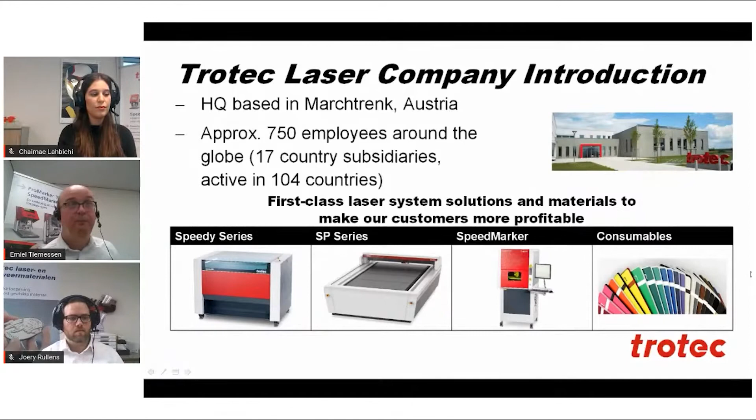Why would you use a laser to earn money? The laser is a universal tool which can be used on a wide range of materials for all the applications stated.

Depending on the type of business you are having or going to start, you can use the laser for different applications. For example, we have customers who have dedicated laser job shops, specializing in engraving products like type plates, data plates, etc. Here you see a product made by a customer of ours in the Netherlands who started in the attic of his house. These people are very creative in thinking of the right solutions for the customer, and they are also able to manufacture all these ideas by themselves with their laser.

Another type of application is adding value to products already in your shop. Think of a gift shop who can instantly personalize your gifts with the desired text. For example, here we see a cutting board and a knife engraved with a laser, from a customer of ours in Amsterdam who has laser machines in their shop. The shop is mainly about cookware, bakeware, etc., and they can personalize almost every product in the shop with engraving. They started in the past with one engraving machine, and once they started laser engraving, they saw quite a lot of extra possibilities, with people coming in for the laser engraving, even people from other shops bringing products to get them engraved.

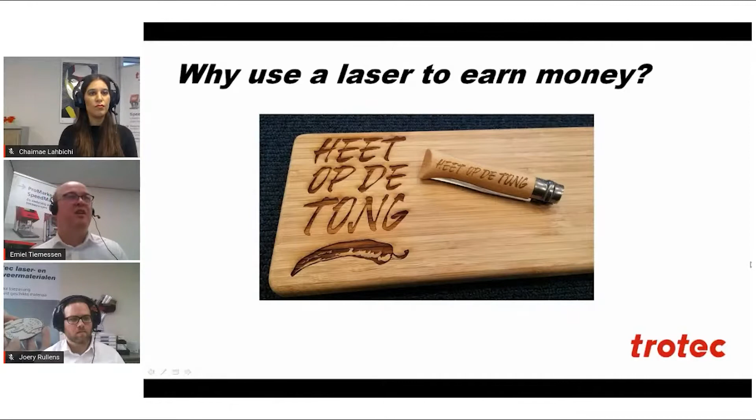So at this moment, they are working with three lasers. And the number of products you can engrave with a laser are uncountable. Think also about bags, wallets, mirrors, jewelry, belts, cutting boards, bowls, knives, etc.

Another type of application where you can earn money with a laser is, of course, saving on costs. For example, companies using a lot of data plates or type plates, panel labels, often need large volumes with short delivery times. Then it often makes sense for them to produce them in-house instead of outsourcing it to external suppliers. For example, you see here a production of our own data plates for the machines, which is also, of course, a typical laser job of working on anodized aluminium.

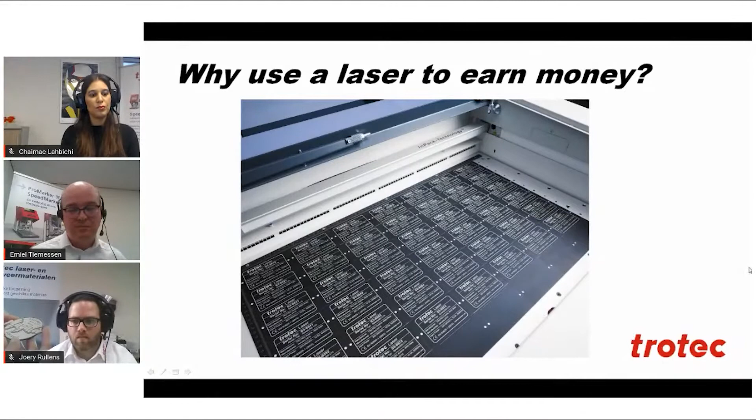Let me briefly explain how a laser works. Well, basically we are talking about three things: engraving, marking, or cutting.

When laser engraving, the concentrated laser beam is focused onto the product you want to engrave. What the laser does is ablate the top layer of your product. On a laser laminate, we remove the top layer so you get a contrast. For the black-white, you remove the black and see the white sheet behind to engrave text plates. But also when you engrave woods, you remove material from the top of the plate, and you get a contrast because the wood gets darker.

Typical products created when using laser engraving are trophy plates, name badges, photo engraving, rubber stamps, promotional products, and computer-generated artworks. Many familiar materials are paper, cardboard, fabrics, acrylics, just to name a few.

Laser cutting is a little bit different. With laser cutting in plastics, for example, we concentrate the beam on the top surface of the material, and the laser melts itself through the material to get a nice clean cut. When you cut acrylics, for example, you get a very nice glass sharp cutting edge. In wood, the laser evaporates the material away, so you can almost say it burns away through the wood to get it cut.

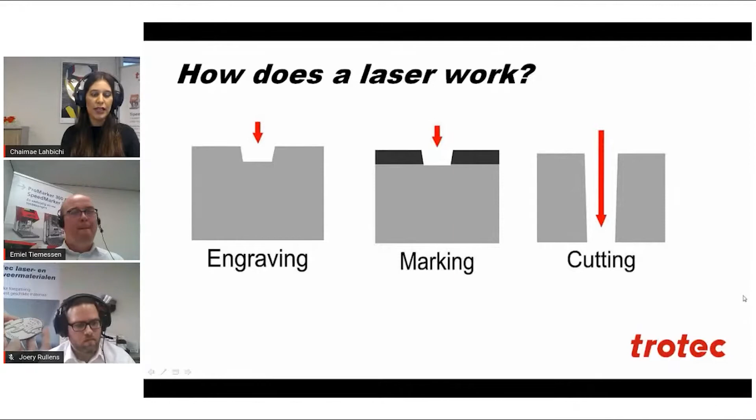So thank you both. Let's first of all start with what kind of materials we can work with. What we see now on your screen are 3 different groups of materials that you can edit with your laser. The first is wood, glass, paper, etc., which are the organic materials. Then we have the metals and the plastics. These are the 3 groups of materials you can edit with your laser, which you can work with.

As Trotec laser, we have 2 different kinds of laser sources. We have, on the one hand, the CO2 laser, and on the other hand, the fiber laser. Just a really rough description of those two is the CO2 can do anything except metals, and the fiber can do nothing except metals. Like I said, this is a really broad distinction between the two. As you can see, the fiber can also colorize plastics, or you can, with an extra marking paste, for example, mark solid on stainless steel. You can do it with a CO2 laser, like a coated metal, or anodized aluminum directly with a CO2 laser.

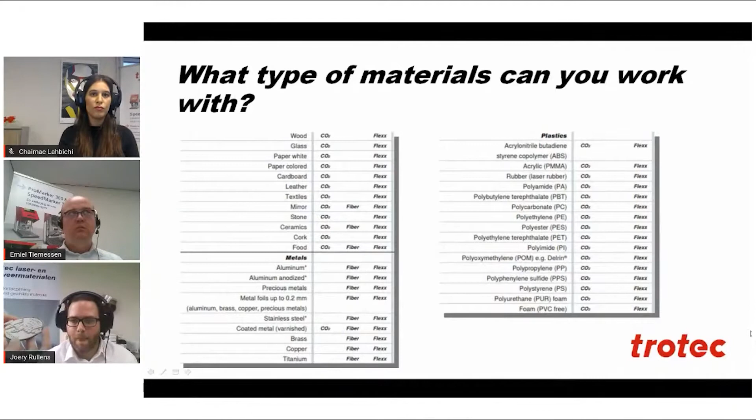And as you can see, you can also see the word flex in my sheet. The word flex means that we have both laser sources in one machine. So you will have one machine that you can work with all the materials that you would like, that you can see on this list. This list is not an exclusive list. There are way more materials we can process. And there's a link if you want a better source. You can see the link on your screen right now.

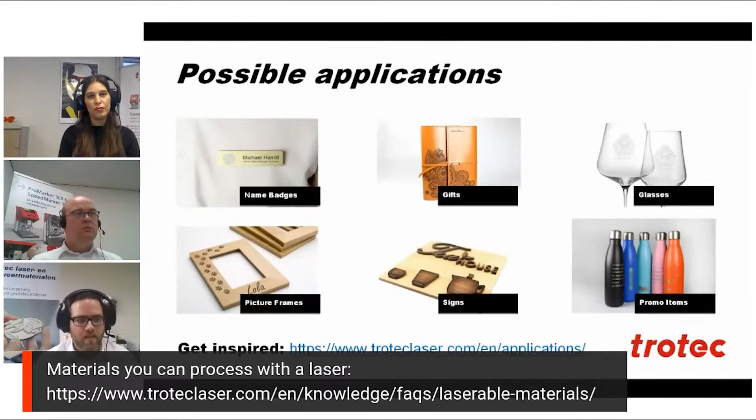Well, with these kinds of materials, we can make multiple applications. Basically, what you could say is that the possibilities are endless. Your own creativity is the limit, because the Trotec laser is easy to use, incredibly precise and fast, and it will do exactly what you tell it, every time and any time. As you can see here, we have 6 groups of materials or applications: engraving glass, making gift cards, making name badges, engraving picture frames, making signs, engraving bottles. Like I said, the possibilities are endless.

But what are your customers looking for? Because the possibilities are endless and you can do a lot with the laser, it's very difficult to tell you this is what your customer needs, this product is what your customer needs. So we're not going to do that. What we're going to do is tell you the broad things customers are looking for, and in our experience, these three points are the most important ones.

High consistent quality, so every product should have a high quality engraving and should look good. Personalized products, because nowadays you can have a mass-produced product and then have your name on it, and it's personalized, and people want that. And of course the world is going faster and faster these days, so fast delivery in high volumes is really important.

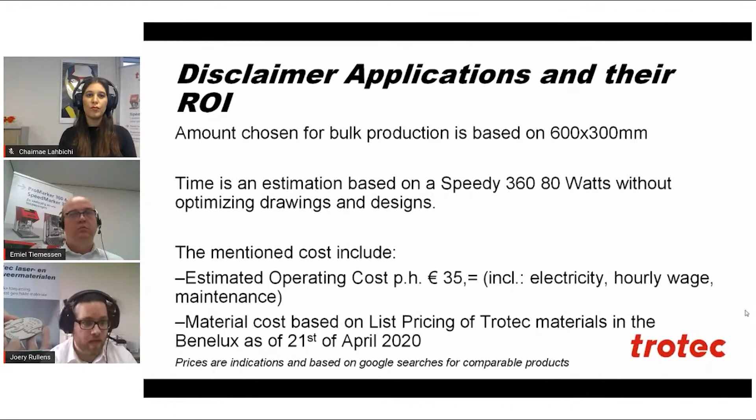The costs we are going to mention include the estimated operating cost of around 35 euros an hour. This includes electricity, hourly wage, maintenance, and the material costs are based on the list pricing of Trotec laser materials in the Benelux as of the 21st of April. And the sales prices we will give are based on Google searches for similar products. So again, it's an average, a broad overview just to help you think about this.

So let's go to the return of investment of this specific application. The single piece was around 19 by 14 centimeters in size. The time it took to engrave and cut one plate is 7 minutes. The cost of the material, including the hourly wage etc., is around 8.75 euros. And if you look it up on the internet, you will see prices ranging from 35 to 45 euros. So your profit per piece would be 26.25 euros. If you calculate this back to profit per hour, it should be around 225. And we will see that this is a number we will see more often - around 200 to 300 euros per hour profit is not strange for a Trotec laser.

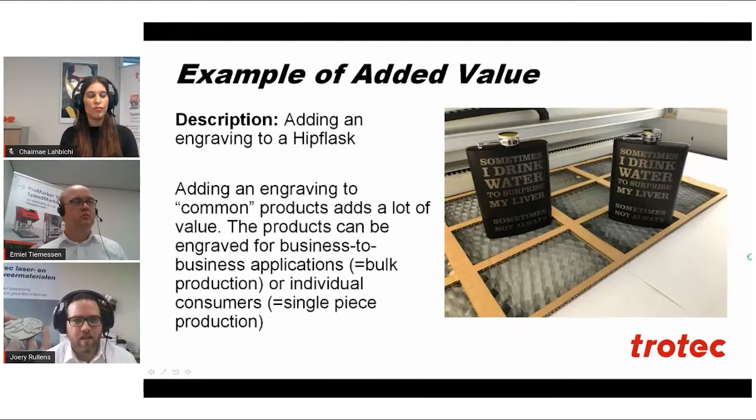So the previous one was an example for a company that makes their own products with their laser - their laser is their main tool. Now we're going to show an example of the added value category that my colleague Emiel was talking about, and this is basically a common product, a hip flask. Common products, if you engrave that, it adds a lot of extra value. These products for business-to-business applications is mostly bulk production. If you sell this to the consumer, it's going to be lower numbers - individual consumers, single piece production, or low series production. And as you can see, you can easily make a mold out of carton for this.

So to the ROI, the size of the hip flasks is around 125 by 85 millimeters. The time to engrave the full hip flask is only 4 minutes. It will cost you, including maintenance cost and hourly wage, around 13.14 euros. The expected sales price is 22.95, including a name. So you're going to make a profit per piece of around 9.86 euros.

However, now we're going to look at bulk production, because that's the way to earn larger amounts of money. We based our bulk production on a size bed of 600 by 300 millimeters. In this amount of size, you can place 12 hip flasks.

To engrave all 12 of them, with the same settings and engraving parameters, it will only cost you 20 minutes. The cost is around 132.67 euros. You will give a bulk discount to your customer of around 20%, which is a bit much, of course, and you will see a profit per hour of 226.96 euros, which is really specific. But we are between the 200 euros and 300 euros range of profit per hour, which I think is a very reasonable range. So keep that in mind if you calculate your own pricing.

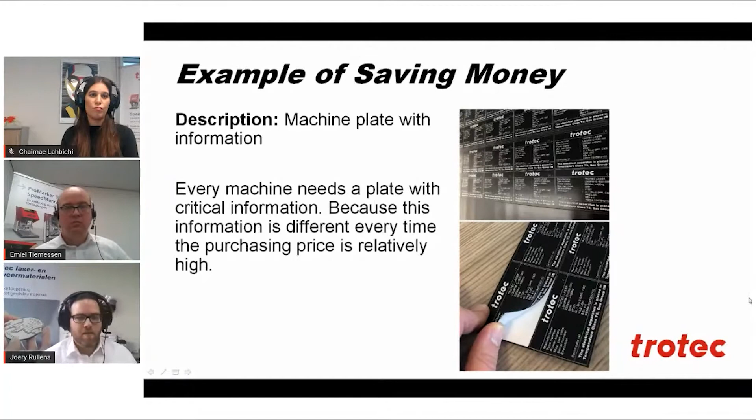So the purchasing price, because every data plate is different, is relatively high if you buy them from a third party. They will charge you differently for every piece. So if you do it yourself, I'll show you the ROI. It's not about making money, it's about saving money. So it's a bit different of a calculation, and mostly these kinds of calculations are done before the machine is bought.

For this specific application, we had a size of 70 by 50 millimeters for one little data plate. The bulk purchasing price on the internet was around €2.95. However, if you start to produce it yourself, you can place 40 data sheets in a sheet of 600 by 300 millimeters. It will take you 19 minutes to engrave them.

And it will cost you around €31.95 for the amount of time, the material, the hourly wage, etc. So if you divide that by 40, you'll see that it will cost you per piece only 78 cents, which is a saving of more than €2 per data plate, which is huge.

However, in our experience, that's not the biggest benefit for these kinds of customers. For them, the biggest benefits are the saving in delivery time, the quality control because you see every data plate before it's on your machine, and your flexibility in data correction. That's the feedback we receive from our customers, which is more important for them.

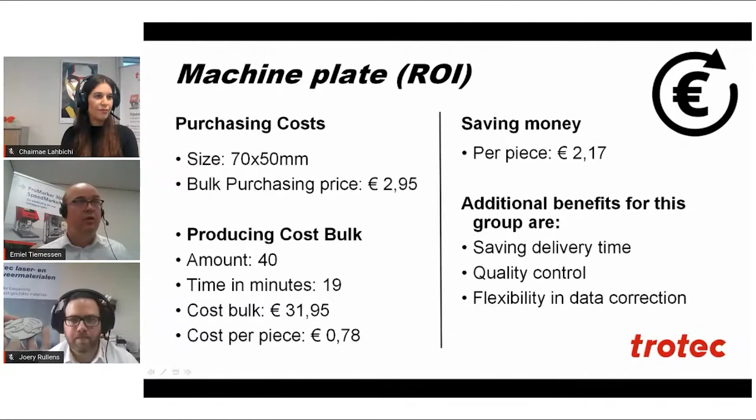Thank you, Joery. Yes, what to look for in a laser machine. Well, one of the most talked about things is the bed size of the machine. What products are you going to engrave? What are you engraving is, of course, the most basic question to answer when you want to choose the bed size of your machine. What is the biggest thing you've thought of to engrave so far?

For example, if you are an engraving shop, you can't predict what the largest product will be that easily, because people are coming in with products to be engraved, etc. But if you are producing data plates, you have quite a good view on the volume to be produced and the time you have for it, so it is quite easy to answer which bed size you need.

But in general, for general purpose engravers, a larger machine is beneficial, because on the larger platforms you can also engrave higher products. For example, in a Speedy 100 you can engrave up to around 17 centimeters high products, and in a Speedy 400 you are around 30 centimeters.

So the larger your machine gets, the larger the bed size is, the more flexible you are in your production.

Another important thing to take into account is the laser power you are choosing. For many engraving jobs, a light laser can do the job. But if you have a lot of work to do, a light laser will take you quite a long time to get your job finished. A more powerful laser gives more production speed, and more production speed in the end makes it possible to get more work out of one laser in one day, so that you can see that back in your earnings. You can do more work in the same time.

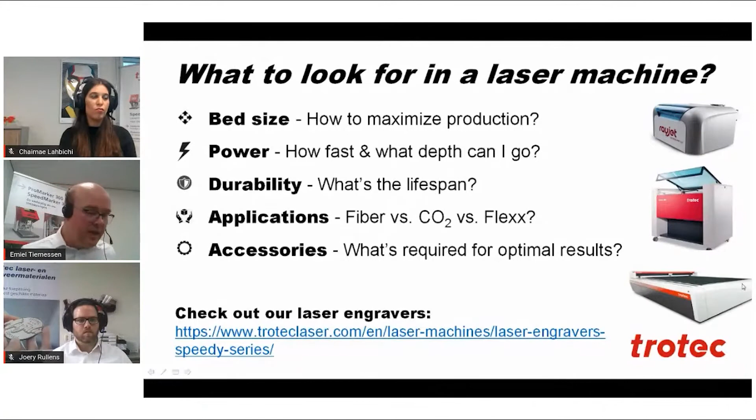What to look for in a laser machine? Quality. Quality is often stated, but what is quality? Quality is not a coincidence. It is something we want to achieve to guarantee you a long lifetime of your machine. And a high quality machine also guarantees that you can always produce the quality of product you need for your customers.

Think also of the usability of your system. How easily can I use my system? Does it have a good way of focusing? For example, our Speedies are supplied with sonar technology, so you can very accurately focus your laser with the touch of a button on your machine. It's very easy. The camera, as I already stated. Our laser software, which is very intuitive to use. We even have an app for your iPhone, so you can see how much time the laser needs to finish its job, etc. Think of the support we can supply as a supplier of your system.

We have a complete parameter book installed into our software. With most applications, the right settings are already installed on your computer with the laser. Very many other settings are stored on our website, so if you have a material which is not in your database, you usually can download it from our website.

If it's a really strange material, you can give us a ring and we can help you. We have our own application specialists available. For example, in the Benelux, when you call us, mostly Joery can help you out with the right settings as an application specialist.

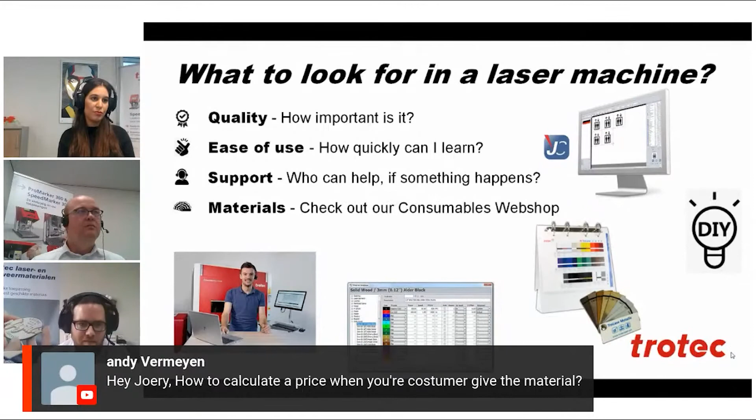Well, if we look back at the sheets a little bit, we are not going to do it, but we would have a profit in the range of 200 to 300 euros. Keep that in mind. Keep the 200 to 300 euros per hour in your mind.

So if you calculate and you're going to be an hour busy with the material, calculate around 200 euros for that, because it's going to be expensive for you to make it, and you're going to be the fastest, you're going to be the best in quality because your machine can do it.

So don't be afraid to ask the price, and if it's too high, the customer will let you know, and you can always give him a discount or talk about bulk production, because bulk production is always more profitable, also for the guy with the laser and for the end customer himself.

So yeah, that's basically how you calculate the price. Get in your mind, what do you want to earn with your machine? What do you need to earn with your machine in order to be profitable as a company? And I think that's the most important part.

Do not be afraid. A lot of people are afraid to ask pricing, and they want to only compete on price. I hope the message has been clear: of course price is important, but there are a lot of other things to think about, like speed, like quality, consistency. Try to compete on that.

So yeah, I would say try to keep in mind what you want to earn per hour, and calculate based on the application how much you're going to charge for the material. And do not forget to charge for a design. If the customer wants you to design something, do not forget to charge for the design as well.